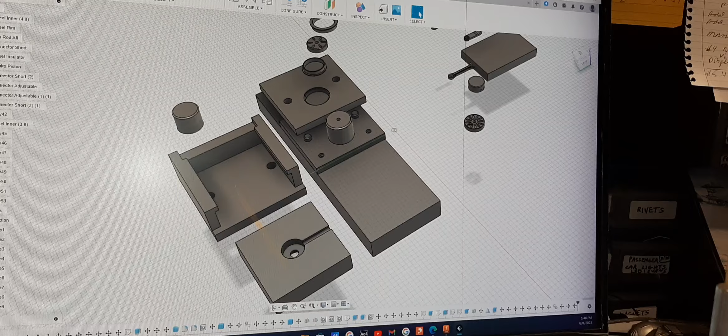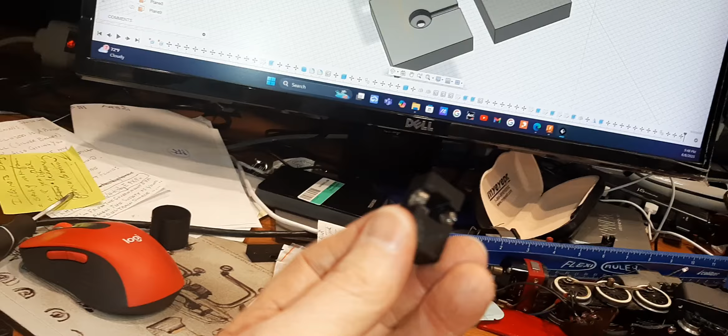You'll never guess what I've been up to for the last 3 days, but it's all part of the chassis I'm designing. What I've been able to confirm is I can press in a ball bearing from one direction, just like the Flyer guys, and the bearings will snap in place and stay, and they are in perfect alignment, axial and all that. And they'll ride like this, so the pressure is always up.

So the lower plate is simply a captive plate. It's not going to have any load on it unless you're pulling on the wheels. But in reality, this should give us a very smooth chassis and replaceable ball bearings if we need to.

Okay, so given that, then the challenge was how are we going to build the axles, right? Because we have the wheels and we have axles, and they go together in a certain way, and we have a gear and all that.

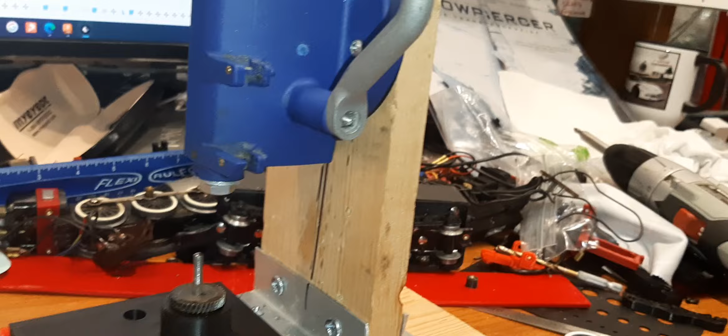So I had this Dremel drill press in a box, just leftover parts, and I thought, that handle kind of goes down, that could be like a press. That could be a press, but I don't have the right parts to press what I need to press.

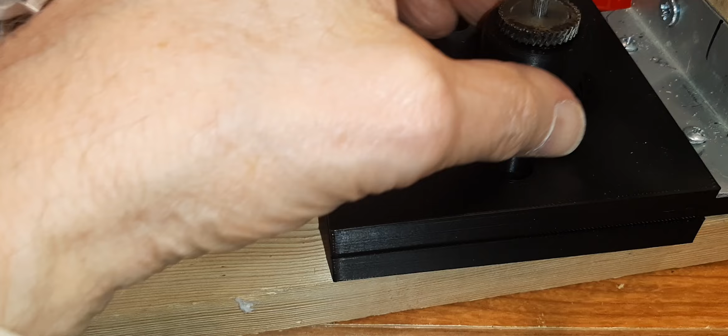Okay, coming right up. So I come up with some templates, some plastic parts. With this new printer, it prints fast and it prints accurate. So this is a base plate here. It'll be screwed down. This is the adapter plate, and it actually is made for a wheel.

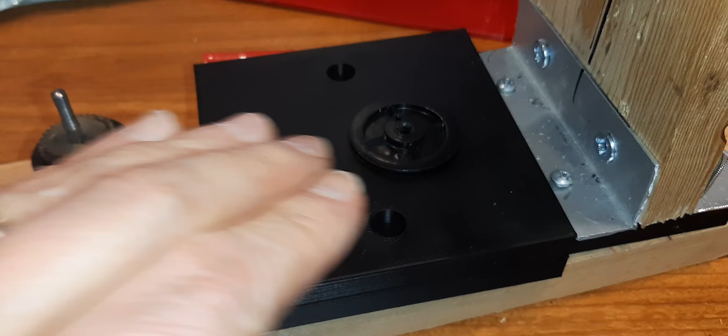Let me get one. So you can press the wheel in inverted like that, and you can stack the pieces up, the rim, the insulator, and the hub, and press them all together in this form here.

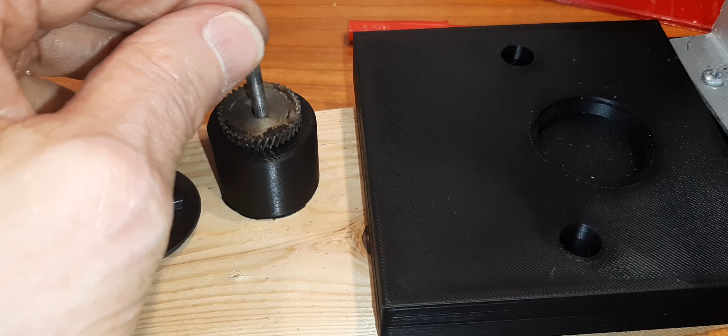So once they're pressed together, then you want to prepare the shaft and the axle. So I've made this thing, and it has a depth that is exactly the depth we need to press this down.

So you would set this up here, and I have another one just like it. So you put that on top, and then you press those two together, and that keeps the gear square and directly in the center of the shaft.

So once you have that done, then you can take these parts off, put the wheel back on, put this on, and if you want, you could put this on the open shaft. Oh wait, before you do that, right?

Before you do that, you have to get a bearing and put it in like that, right? Okay, so you get the bearing, you do that. Okay, now you get the wheel.

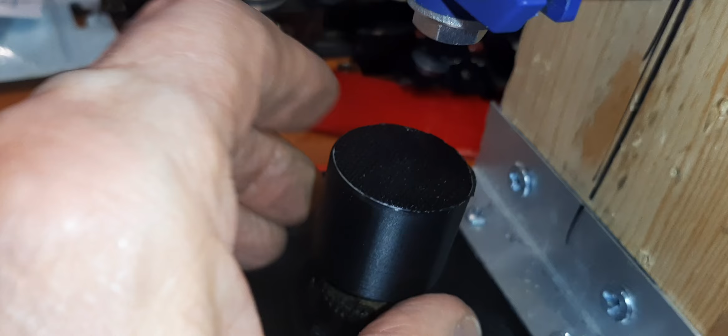Now you press this down, and it still has the stop, so it's only going to press it so far, and then it's going to stop. Then you take this out after it's assembled and all that, this one, right?

And you flip it over, and you put in the next wheel. You put in the next wheel, right?

And you put in its bearing, and then you put the assembly back on, and then the upper, there's an adapter for the upper plate. Once you take this off, there's another adapter that is actually that cavity again, and it comes down over the wheel and centers everything and squares it up, and then you press it down, and you've got everything pressed.

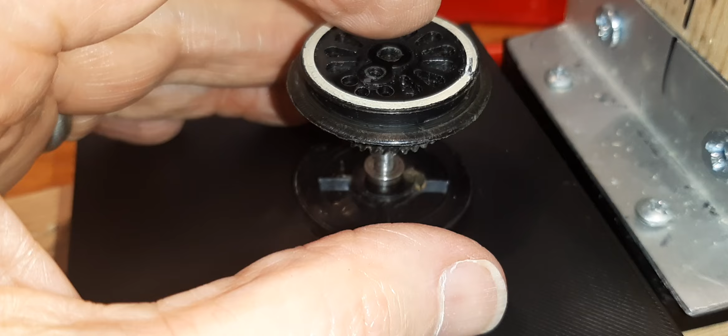The axle stops at the end of the wheel, and the gear is in the center, and you've got two ball bearings that can slide around on the axle, and then you go to your engine, and you position the two axles. Well, this one wouldn't work, right? You'd have the real one, with the gear, we go in the middle.

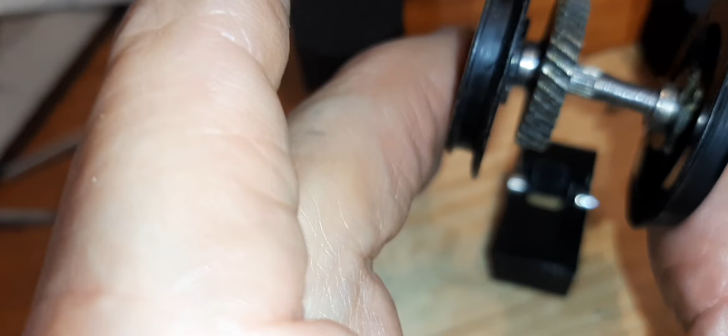You position your two axles, and you just push it down until it goes snap. Now you've got the gear and the drive wheels with the ball bearings.

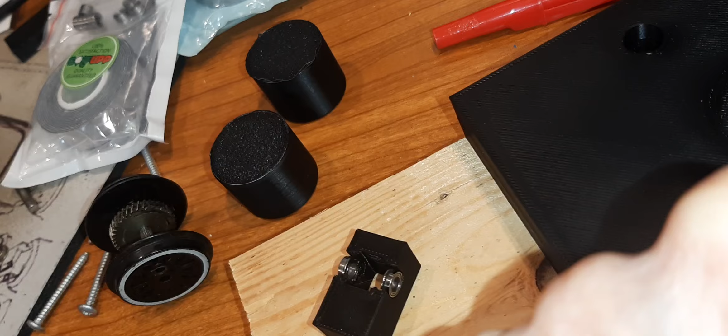Oh, I forgot one thing. We're going to add a pin here, and a pin in the upper one, to locate the mounting screw or the side rod boss, whichever is there. So we're going to have a pin or a hole so we can locate these wheels. This kind of wheel, we're going to locate with a hole, and these wheels with a pin.

And so you'll clock them, right? We'll have one, but I've looked it up, we know what the rules are. One direction here, and the only way you could put the fixtures on, those holes line up perfectly. So every axle assembly will be clocked, pressed to the right depth, and the gear will be centered, and they will all have ball bearings pressed into the 3D printed chassis.

And on top of that, I have some really good lead tape used in golf clubs and whatnot. The beauty of it is this is heavy lead, heavier than normal lead, so you won't need as much to have the weight. I don't know exactly what this weighs, but it's pretty good heft.

So we can ballast the lower plate and the upper plate with lead, then create some cavity, put the lead in, and when we bolt it, like this plate here, this won't have any holes in it. It'll just be a flat plate with a cavity along the top, except for where the bolt holes go. That'll be supported, so we can cut the lead and press it in where there's a cavity, and then this upper plate will be weighted, and the lower plate will be weighted as well.

So that's what I've been doing for about three days, and I'm printing this part right now. I have, that's wood, that just pretends to be my board, but we may make it all plastic eventually.

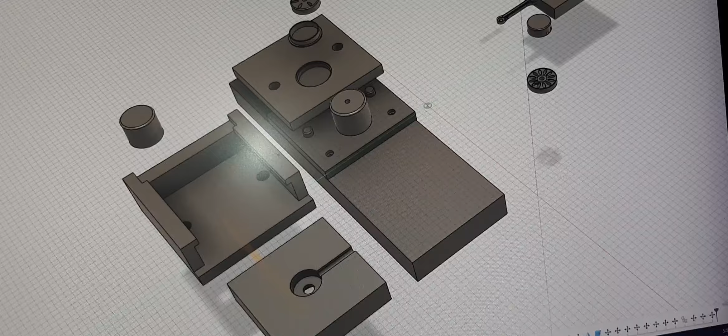But I have these two parts made, and this is a spacer I needed, and this part's getting printed. I have this part, and we have these wheels, so this part will be the next one, and it's going to be a little messy, but I think we can handle it. It's going to be on the back side. It has this hole for the wheel, or you can put that in and hold the axle that way, but it just slides on. This locks on with that tab, then this one slides on and it stops exactly where it should be, and we should be good to go.

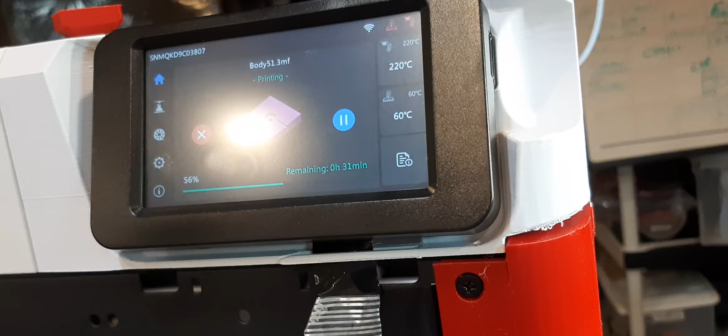And this old boy has just been working like a champ. He's been doing a great job. There's the part, there it is, working his tail off, sucking that plastic off. Look how fast that roll is going. He's putting her down, he's really putting it down. Unbelievable. This haze, you peel it off.

I just haven't gotten around to it. You actually do get to see in. Plus I have a camera, I'm going to install it so I can look on here, or on my PC. I also have some lights that I can turn off and on and see what's going on inside.